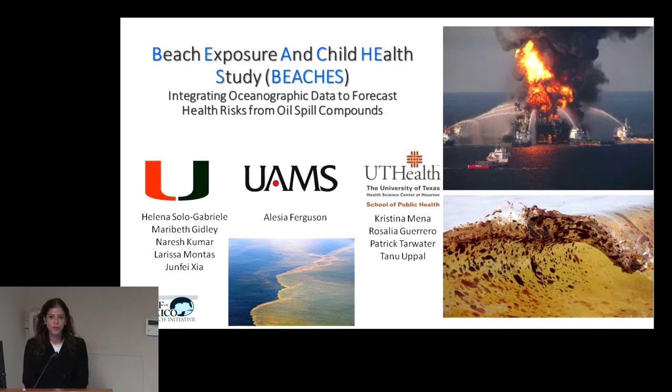During the time of the oil spill, there was considerable uncertainty regarding the health risks associated with the oil spill, especially for children who are more vulnerable. Uncertainty also existed for the spread of oil spill chemicals in beach sand, water, and air. Fisheries and beaches were closed even in areas which were really far away from the edge of the plume.

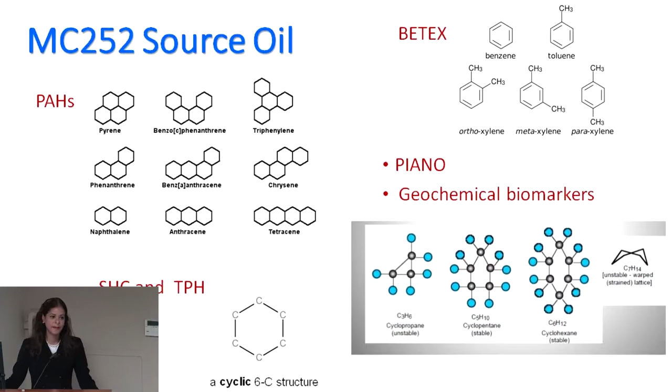Crude oil is one of the most diverse and complex organic mixtures found in nature. It contains thousands of chemicals, with the most predominant ones being hydrocarbons. It's important for us to understand the chemical composition of crude oil because each chemical or mixture of chemicals has a different effect on human health.

The overall goal of the Beaches research study is to improve estimates of uncertainty in children's exposures and risks to their health due to oil spill chemical concentrations.

Now you might ask yourselves, why are we looking at this in light of children? Well, scientific data indicate that children are more susceptible because they have proportionally more intake of chemicals. They have multiple routes of exposure, multiple pathways of exposure, and their activities as related to their social behavioral patterns make them more susceptible than adults.

We plan to utilize historical data from prior oil spills to create, test, and validate algorithms that describe time-space specific concentrations of oil spill chemicals in beach sand, water, and air, especially in zones where children play.

A third part of this project involves creating a risk assessment platform which utilizes the human activity and exposure side of the project in combination with the oil spill chemical distributions to create a risk assessment modeling platform which can guide beach closures in future oil spills. Statistical methods based upon Monte Carlo approaches for the confidence bounds will be utilized for the risk assessment.

Now, how do we plan to do this? How will this be achieved? At this point in time, I am calculating or developing algorithms retrospectively. I am utilizing data generated by the National Oceanic and Atmospheric Administration, NOAA, and its fate and transport model, GNOME, which was run on a daily basis from the 24th of April until August.

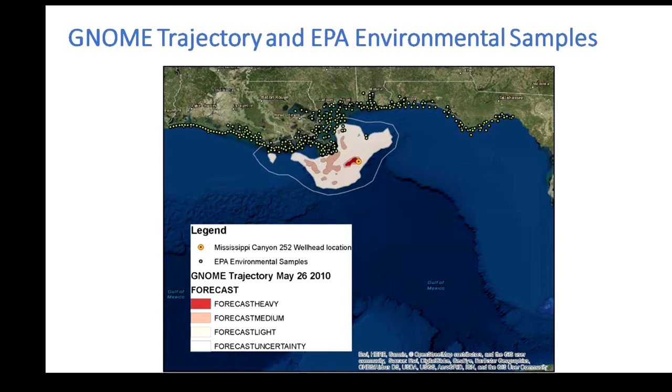Now, where do we go from here? As I mentioned before, the overall goal of this research project is to improve estimates of uncertainty and health risks to children due to oil spill chemicals.

We plan to develop a risk assessment platform which may be used in future oil spills, and we plan to develop algorithms which can predict oil spill chemical concentrations in beach sand, water, and air, particularly in areas where children play.

We hope to contribute to the body of knowledge in risk assessment for children to reduce future uncertainties to health risks in future oil spills. Thank you for your attention.

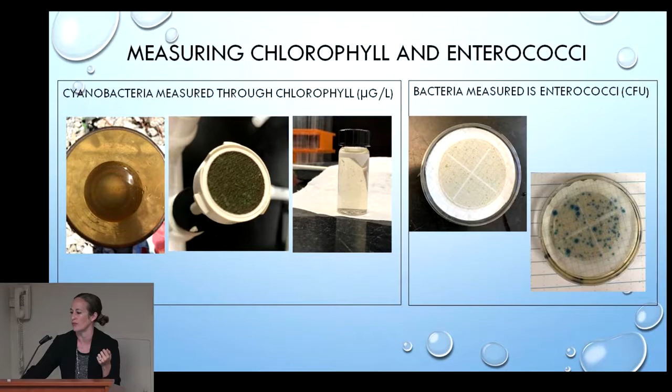How do we measure chlorophyll and enterococci? With cyanobacteria, you can measure this through the chlorophyll itself. It's a filtering method where you put it on the filter, then into a spectrophotometer or fluorometer, and you see the fluorescence that comes back to see how much chlorophyll is present. For enterococci, you measure the bacteria by filtering it through water and through the filter, then incubate it for 24 hours. After that, you count the number of colony-forming units present in the filter.

For this study, we chose 3 sites. The 2 sites, Roosevelt Bridge and Dubois Park, are from the Florida Healthy Beaches program. These are monitored specifically for enterococci. We noticed them through a survey of all the beaches in the state that were measured, and these 2 happened to really stand out with their enterococci exceedances. Roosevelt Bridge is also on the St. Lucie River, an area that tends to have a lot of problems with cyanobacteria.

We also chose a Lake Okeechobee site, since a lot of times when people talk about why these blooms are happening, they mention the releases of water from Lake Okeechobee. So we threw in our Canal Point site, which provided us with background on what was going on in the lake. At the same time, we looked at the enterococci and cyanobacteria at Roosevelt Bridge and Dubois Park. You'll also notice a spot showing the flow from the lake.

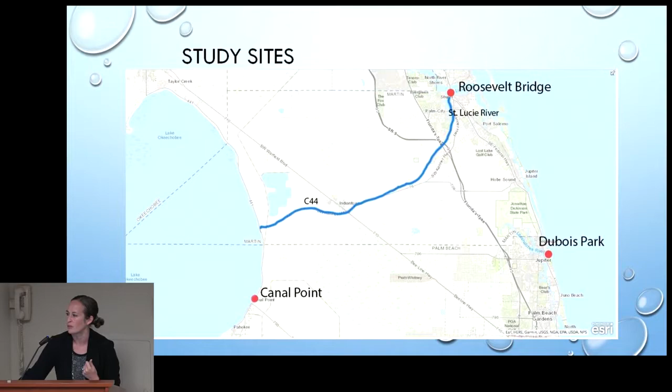C-44 is a man-made canal. This is not part of the river at all, it's been dug out. Right around S-80, about 7 miles from Roosevelt Bridge, it actually joins the St. Lucie River. So it's sometimes known as C-44 S-80, but this is not the entire St. Lucie River — it only becomes the river right up at the top near Roosevelt Bridge.

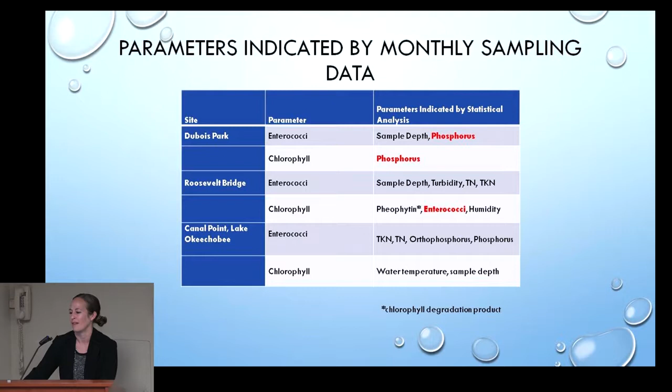So looking at all these beaches, recreational areas, and managed areas, we compared enterococci and chlorophyll to see why these two exceedances happen at the same time in somewhat the same areas. At Dubois Park, which is not known for algae exceedances, on the Loxahatchee River, they don't have these same issues, perhaps because there are no lake releases, but they both have phosphorus in common. Roosevelt Bridge did show correlation with enterococci, and we didn't have much in common with the lake data. So this is what we've learned so far, and future work will focus more on these findings.

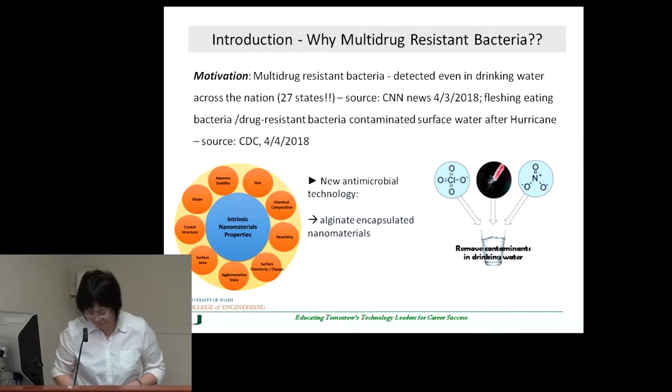So the hypothesis is: what if we make a nanomaterial coated with biodegradable materials so we can minimize the leaching issue of the nanomaterial in water? Second, if we coat biodegradable material onto certain metal oxide nanoparticles that have high resistance against antibiotic-resistant bacteria, we can have better control in terms of targeting drug-resistant bacteria. Another hypothesis involves reactive oxygen species generation, so that with the release and generation of reactive oxygen species, the nanomaterials from aerosol generation can treat and target particular types of bacteria in water.

So the goal is to develop and advance new antimicrobial treatments for multi-drug resistant bacteria, especially to deal with difficult-to-treat contaminants of concern.

So this is the alginate encapsulated zinc oxide. It's a new antimicrobial material. Without the zinc oxide nanomaterial coated on the bead, nothing happens, so no removal in water.

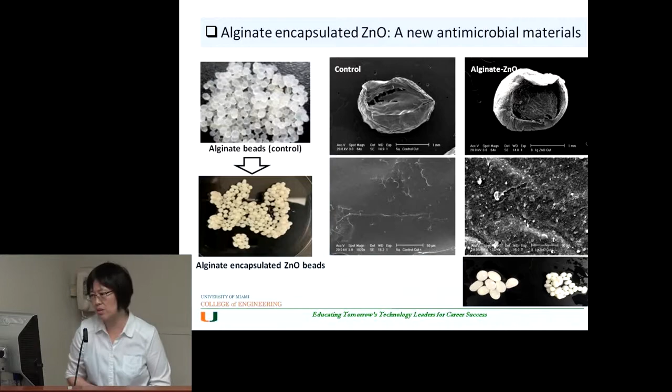But when we coated the zinc oxide, which is one of the materials that has high antibacterial resistance, bacteria can easily be removed from water. So alginate encapsulated zinc oxide beads were successfully synthesized, and we saw significant removal.

Now people are confused about whether E. coli is a deadly bacteria, but there are many different types of bacteria present in water. The E. coli we used was DH5 alpha type, which is one of the antibiotic resistant bacteria, and also Pseudomonas aeruginosa, which is one of the multi-drug resistant bacteria.

So we found very interesting significant removal with only a small amount of zinc oxide encapsulated in the alginate bead. The alginate is an environmentally friendly, biodegradable material.

So in order to confirm the possible mechanism, one of the hypotheses we came up with is the release of reactive species. So what about if we minimize the ROS generation?

So we added the scavenger NAC. NAC is a scavenger of ROS. Adding the NAC, we found significant inhibition of ROS generation, which confirms one of the primary mechanisms responsible for treating the bacteria in water.

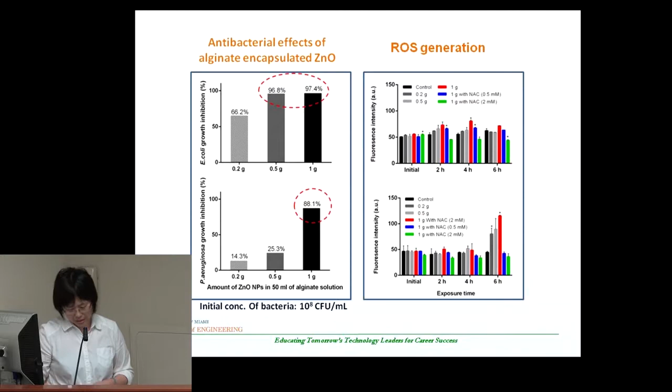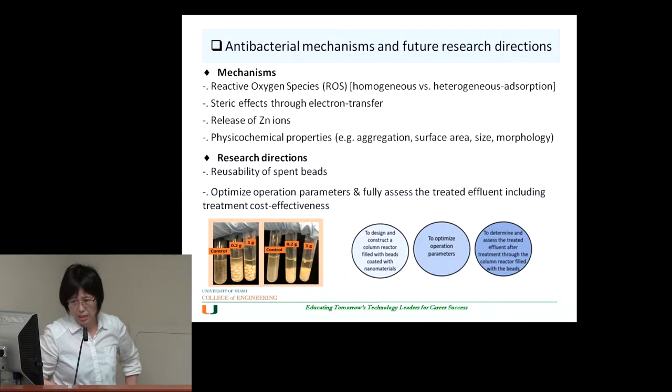So the future research direction is that we want to test how reusable the bead is, and the further application is to optimize the treatment parameters better.

So we are currently working with the company, collaborating with Jacobs CH2M, and this was supported by EPA, and my student is working on this project.

Thank you for that. Okay, so before starting with the presentation, let me set you a little bit in context. So please raise your hands, all those that suffer traffic delays here in Miami. So all of you, right? Don't be shy, come on.

So mainly all these traffic delays are caused by the repair work that takes place in our bridges and roads. Our bridges and roads are mainly made of steel reinforced concrete, which is steel reinforcement with concrete. What happens is that in areas such as Miami, where we are close to the water, this steel reinforcement gets corroded, leading to deterioration of the whole infrastructure and leading to these repairs. Here in the US, per year, we have more than $22 billion in costs for these repairs.

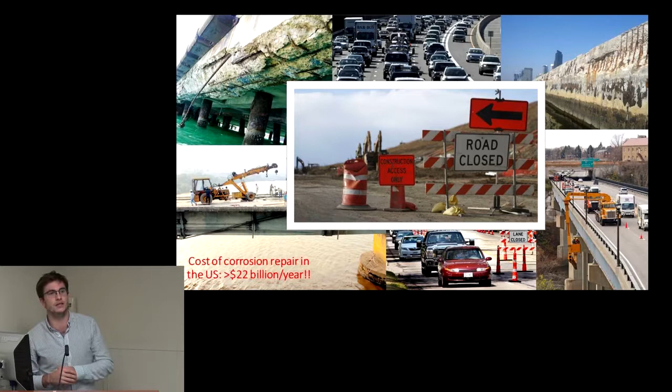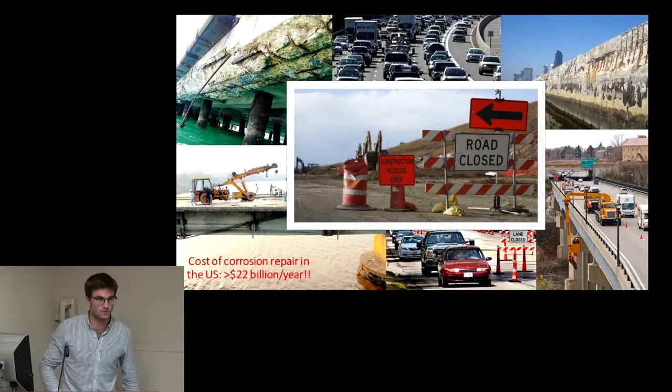So there are many other universities working to try to reduce these delays. What we do here at the U, we always go one step further. So we just try to get the corrosion out of the equation. How do we do it? Using another type of reinforcement, which is glass fiber reinforced composites.

As you can imagine, we cannot be here 100 years testing all these materials to check their durability, so we have to use some tricks, and in this case we use accelerated aging. We put this reinforcement that is going to replace steel into what we call magic chambers, filled with seawater at high temperature. We use three temperatures, 23, 40, and 60 degrees C, and we leave the material for 60, 120, 210, and 365 days.

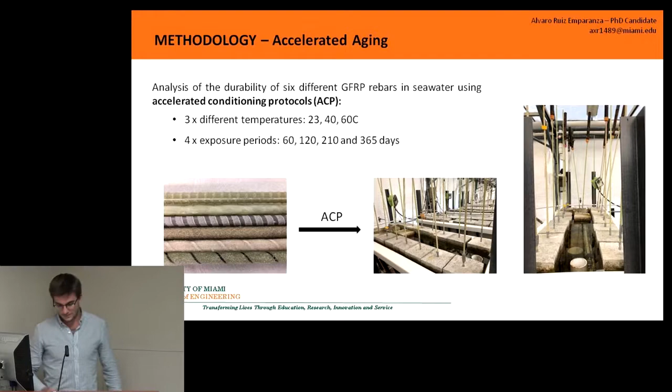After we leave the material for that time, these chambers at high temperature are going to degrade the material. So we need to check the properties before and after this accelerated degradation. We do a lot of testing: mechanical testing such as tensile tests, different shear tests, and also bond to concrete, since that's a very important parameter. And we also go a little bit more fancy.

We go also to the microstructure. We do SEM, scanning electron microscopy, and we check how that degradation is affecting the microstructure, and if there is a big difference between the pristine material that comes directly from the manufacturer and the material that has been aged.

Afterwards, now that we have the accelerated aging data, we have to come up with a relation between that accelerated aging and real life. For that, we use complex mathematical models, such as Arrhenius relationships, that relate that extra high deterioration to what it means in real life.

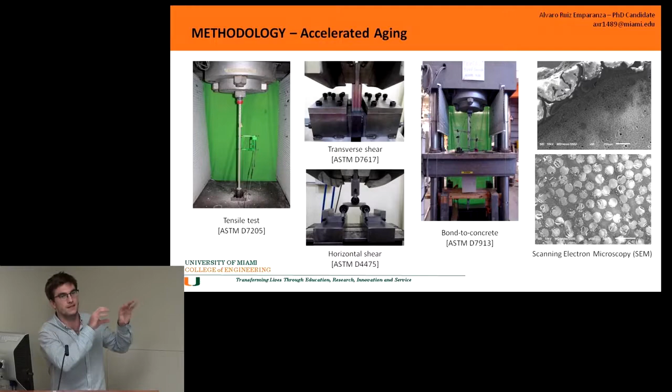So what we saw from this research, it's not completed, but we have a lot of data that allows us to draw some preliminary conclusions. Until now, there's no major deterioration, so we are proving that the durability that this material is said to have is really there. We see that we have different materials and different manufacturers producing different bars, and each of them has different properties, but all of them meet the durability standards.

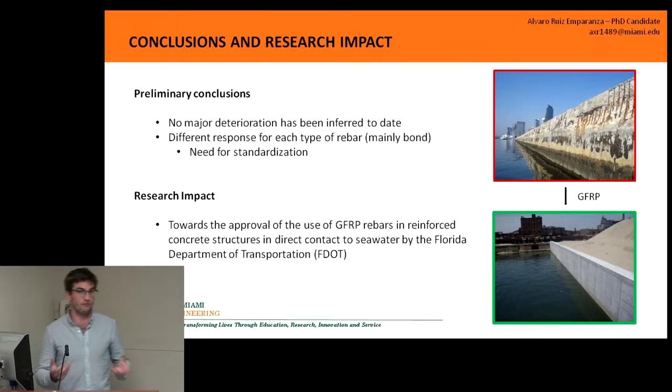However, we are claiming that there is a need for standardization of these materials, since it's going to be better for commercialization. This is the most important part of this project, that it has great impact on our society. Right now, the Florida Department of Transportation, who is very interested and funding this project, is not allowing this material to be used in structures directly in contact with seawater because there isn't enough research. However, they are funding this project because they want to see, after all these tests are done, if the durability is proven, then they will allow the use of this material in, for example, seawalls. Here in Florida, with the hundreds of miles of seawalls we have, we could have them corrosion-free by using this material.

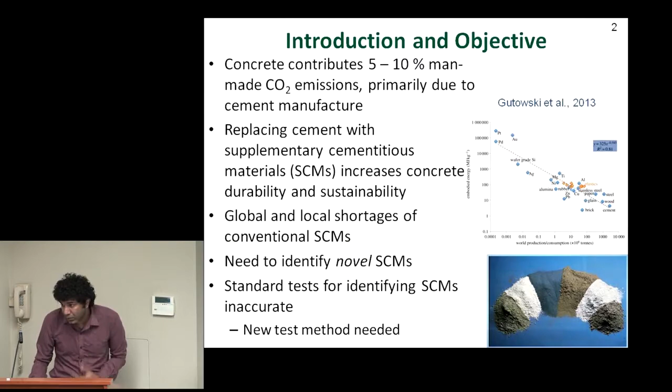So what we've been doing is trying to study the fundamental process of what's happening. That fundamental process is simply that supplementary cementitious materials react with calcium hydroxide. Calcium hydroxide is not good for the concrete. That reaction produces calcium silicate hydrate, which is good for the concrete. So if a supplementary cementitious material is reacting with calcium hydroxide, that's a good indicator that it's good for the concrete. So we have to identify this reaction.

So what we do is use a model system of supplementary cementitious materials and calcium hydroxide, crudely illustrated there. There's a couple of other variables I won't get into the details of. Essentially, we measure two things: how much calcium hydroxide is consumed, and how much heat is released. These are actually not identical, for somewhat complicated reasons, and those are the test methods you use to do that.

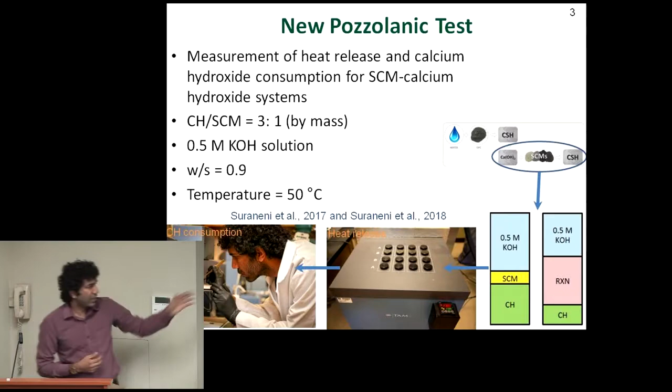That second picture is from a while ago. Unfortunately, I'm not allowed in the lab anymore. Well, I'm not allowed because my students get scared when I'm standing behind them, but just kidding.

So anyway, moving on to some of the results. This is from about 50 different materials, including about 10 or 11 different classes of materials. What we see is that this material classification system we've developed actually gives about 5 or 6 different classifications of these materials. You have highly pozzolanic, more hydraulic, pozzolanic. These are good materials; we want to use them in concrete.

Interestingly, almost all the conventional SCMs that we tested fall into that category, not very surprising. Then we have inert, which is really not doing very much, and less hydraulic, and these, for the most part, are not that effective as supplementary cementitious materials. We tested 3 new materials. One is fly ash coming from the burning of municipal waste. You can imagine that something like this is a material that's going to be very commonly available in the future.

The other is a slag coming from the steel making industry. Both of these materials are from China. Unfortunately, they're really new materials, but they turn out to be not very useful. The third is a powder coming from grinding of lightweight aggregates, which is used very commonly in concrete. That one actually turns out to be pretty good.

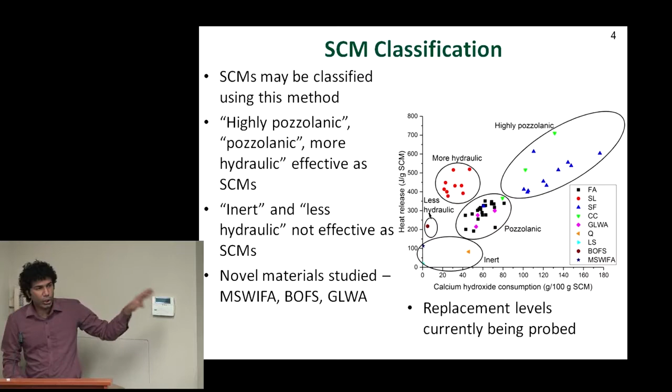We don't have to worry about the individual classifications. The idea is that if you have something over x equals 60 and y equals 200, you probably have a really good material. Right now, we're actually looking at, depending on the classification, what sort of replacement level of cement and concrete we can use. There's actually quite some science into this as well.

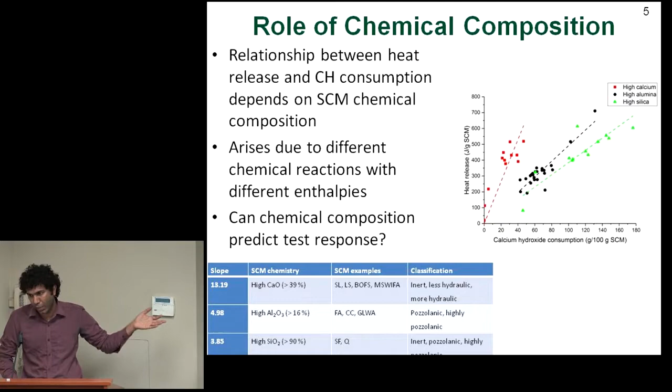So we took all of those 50 materials and grouped them into 3 different types depending on their chemical composition, and this is just the bulk chemical composition. Depending on their calcium, alumina, or silica content, you get very different slopes, and this seems to arise because of different reaction enthalpies. This is really nice because then we only need to measure one of these 2 tests to get the other one. So the idea is we can predict fundamentally from the chemical composition the response.

So to conclude, we propose a new test. This test seems to work really nicely so far. The relationship seems to depend on the chemical composition, and in the future we look to study more new materials as well. Thank you very much.

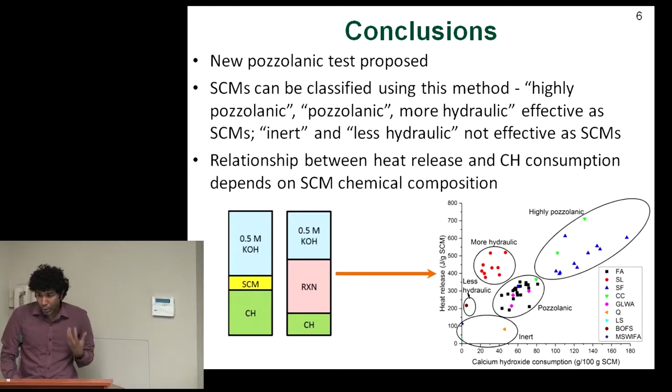My name is Caitlin Kozar. I'm a PhD student under Dr. Garamani. My topic is a bio-inspired approach to sustainable concrete.

So right now I'm focusing on 3 common proteins. These are actually very well-researched proteins. Albumin and lysozyme are both used in food products—you've probably eaten them today. And hemoglobin, as you know, is found in blood. The reason we chose these is not only are they well-researched with known properties, but we were able to test their foaming properties in an alkaline solution.

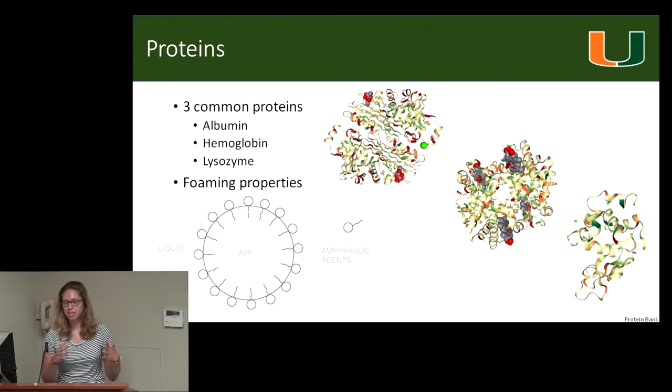Now, cement is very high pH. It is not very well suited for living situations for these proteins. So we focused on the actual foaming abilities. Basically, we did various tests. Anyway, we put these into cement to test the changes they actually made in the cement.

For albumin, we actually saw a high increase in the air content. As you can see, it went up to 6.5%, which is far greater than a normal cement. It also increased the setting time and decreased the flowability, which allowed the air voids made to remain trapped in the cement. Hemoglobin was very similar—it had a very high foaming ability, but a very low air content because the flowing was so high and the setting time was over 30 hours, which allowed all the air to escape.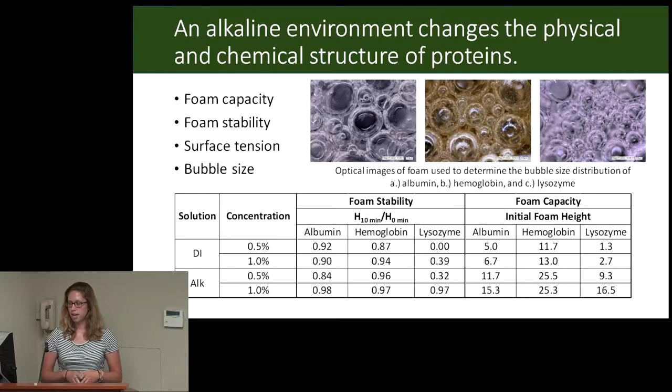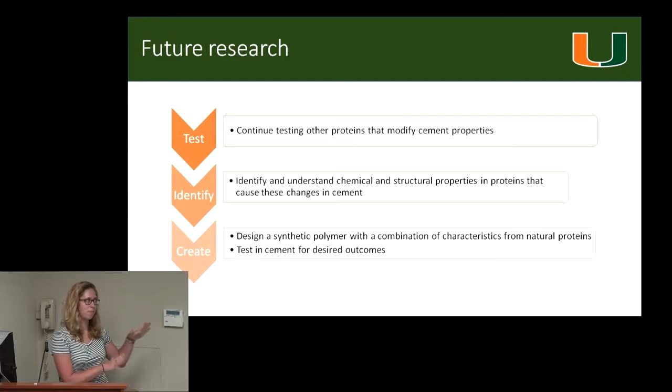So we tested basic tests in these alkaline environments that are well known in distilled water and other materials, and compared them to our results in cement. We're currently working on analyzing the results and finding connections in how we can continue this and test other proteins, synthetic polymers, and other modifiers in order to eventually create our own bio-inspired admixture based on proteins as a building block. So yeah, that's about it.

Good morning, everyone, and welcome to this presentation. My name is Babak. My advisor is Dr. Ali G. I'm going to talk about the use of hydrogels to improve the sustainability of concrete.

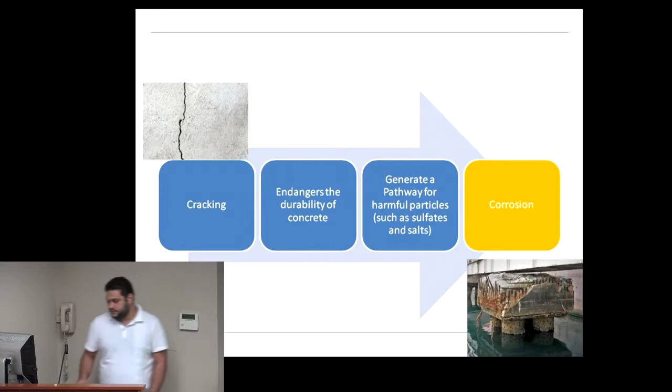Most of you know that concrete is a widely used material in construction, but one of the problems with concrete is cracking, which endangers the durability of the concrete because it generates a pathway for harmful materials such as sulfates and salts, which cause corrosion. We have different types of cracks—I'm not going to talk about all of them.

Some of these happen before the hardening of the concrete, and some happen after the hardening of the concrete. So what I want to look at is the autogenous shrinkage of the concrete, which is the loss of water from the paste to allow hydration in mixes with low water-to-cement ratio.

So the idea here is that because we lose water from the paste in the concrete, we get cracking, but we have to do something to keep the water in the system.

So the idea is to use a material called super absorbent polymer, SAP. The commercial version is used in baby diapers. It has the ability to keep water inside, absorb it, keep it, and also release it over time so that we can control the shrinkage.

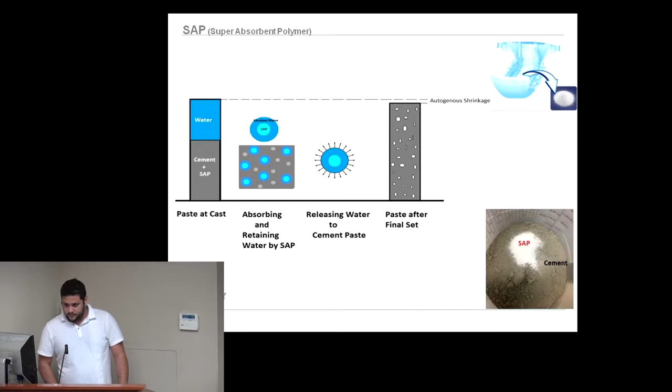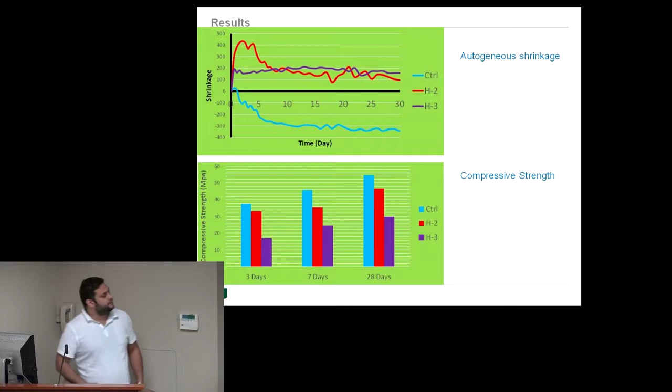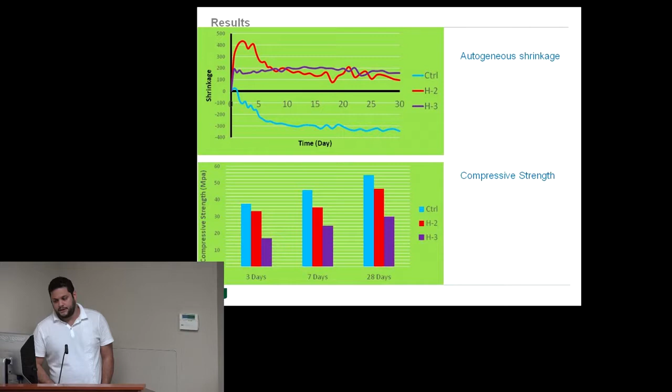So this is my result. I have already used two different kinds of SAP. As you can see in the first graph, the amount of autogenous shrinkage is mitigated using the hydrogel. But the problem with the hydrogel is that the compressive strength reduces, because it leaves some voids inside the paste.

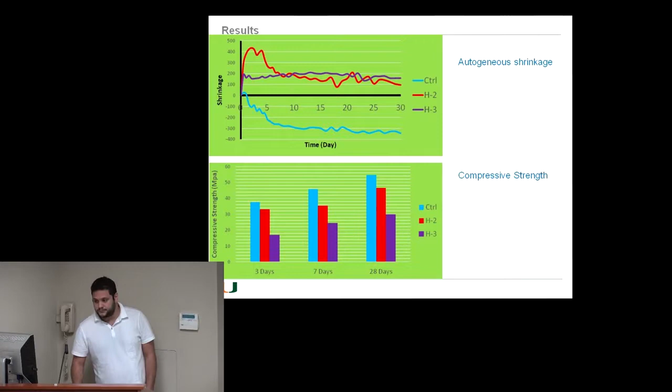Good morning, everyone. I'll be talking about the enhancement of coastal resilience in terms of our structures in our cities. This is all about collaborative design and multiple projects with multiple experts.

The disaster could be man-made. In this case, we're talking about hurricanes, coastal storms, flooding, and other events. So it's not just reacting to an event, it's how we get back. There's a component of time, and there are multiple perspectives on that.

Because there are multiple perspectives, we have to address this complex problem through a collaborative design approach. Collaborative design is not an abstract concept. It has been studied and well defined in literature, and one definition by Kuan describes it as parallel expert actions. This is something we all do.

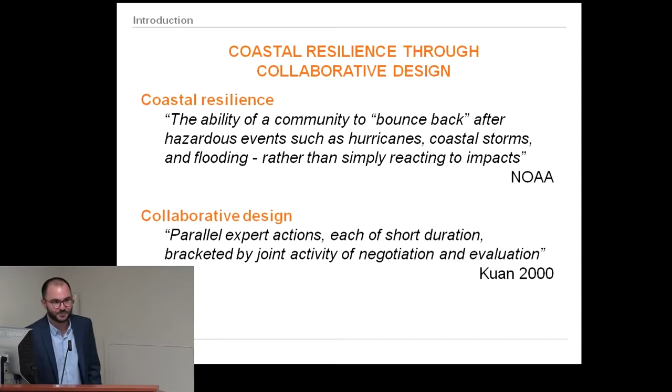They have a short duration—that's relative, they can be long or short—but what I want to focus on is the last part, where we are bracketed by joint activity of negotiation and evaluation. If you've ever worked in teams and collaborated, I'm sure you had interesting negotiations and evaluations throughout your projects. So I'm going to show you a series of projects where this happens all the time.

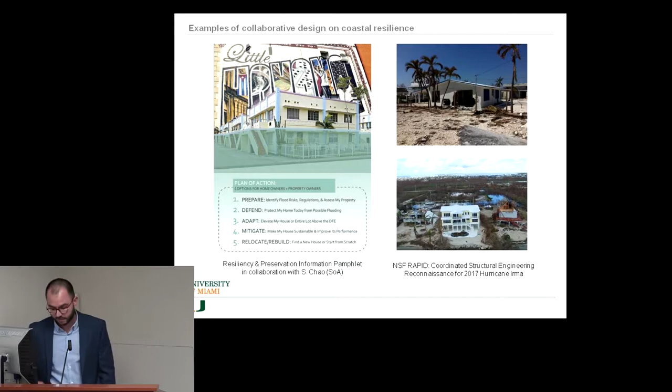This is actually what we're studying in another collaborative project with RSMAS and Brian Haus at the SUSTAIN facility. SUSTAIN is the surge structure atmosphere interaction facility. We simulate wind and wave action, and we can come out with the load under different time series so that we can test structures and understand the interaction between wind and wave under a hurricane.

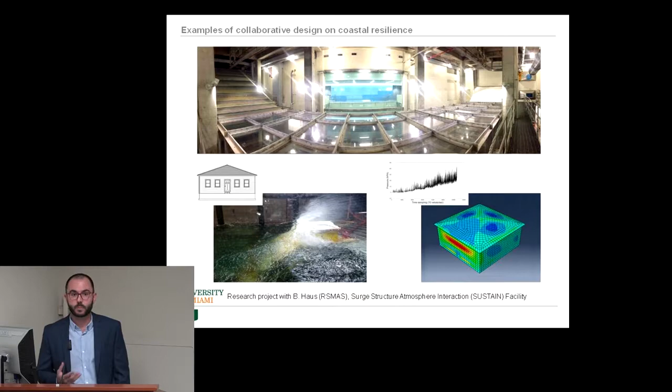So we want to study the loads so we can reinforce our structures, but in order to enhance coastal resilience, we can also protect our structures. To protect our structures, we can work on multiple fronts. One of those, which relates to a talk given previously by Alvaro on composite materials, is this project that just came in.

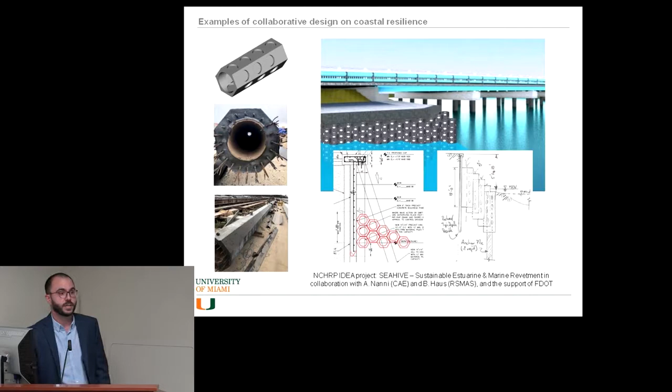This is going to be a project about an eco-friendly, biocompatible, modular, efficient seawall design. In this project, we collaborated with Dr. Nanni, as well as Brian Haus, to get the efficiency there. But we also worked with ecologists who ensure biocompatibility, not only in terms of the material, but also in terms of the shape and structural complexity of the design.

Another project is the U-LINK project—the Laboratory for Integrative Knowledge, studied in our school. In this project, we're studying the effect of corals on wave energy dissipation.

So what we're doing there is we're working with ecologists who are focusing on coral restoration to see how corals can be used to actually enhance our coastal resilience, so how they can protect us from the waves.

We make measurements of the waves before and after a coral reef, and we estimate the wave energy dissipation, which is the key parameter that determines that, and how we could enhance that with structures.

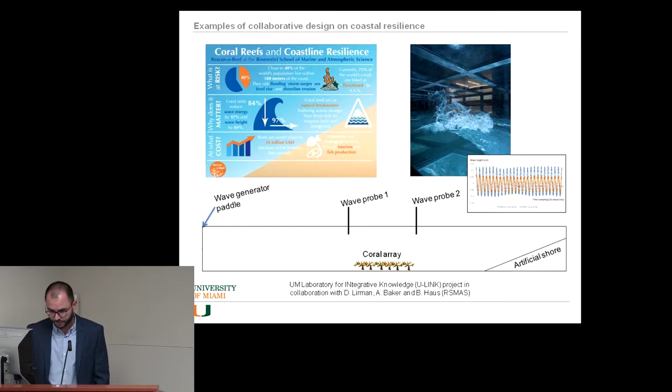Lastly, when we go to the scale of a city, there are multiple parameters there. At the city level, we cannot act only on engineering; we have to take into account urban design, and we have to take into account the social science that is hidden within a city. A city is a living organism, and it has a social character.

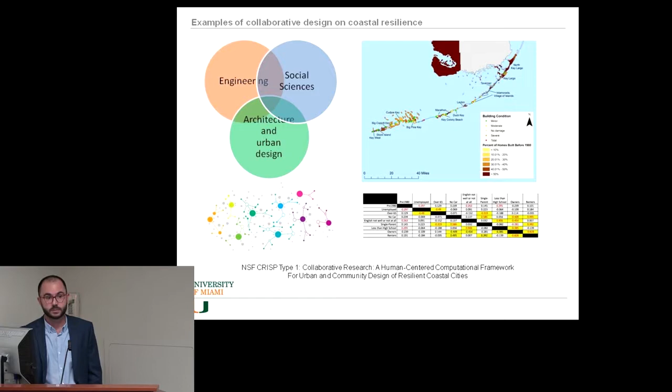So what we're doing there, we study the infrastructure networks using graph models in order to understand their behavior under damage, quantify their performance throughout, and integrate those social aspects through our models.

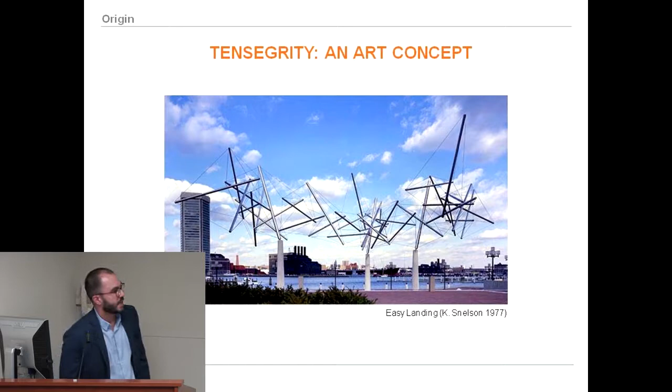Directly when he did that, he was working with Buckminster Fuller. Buckminster Fuller is a well-known architect, engineer, and a multi-dimensional personality. He came up with the word tensegrity, tension and integrity, which then was used in multiple other projects.

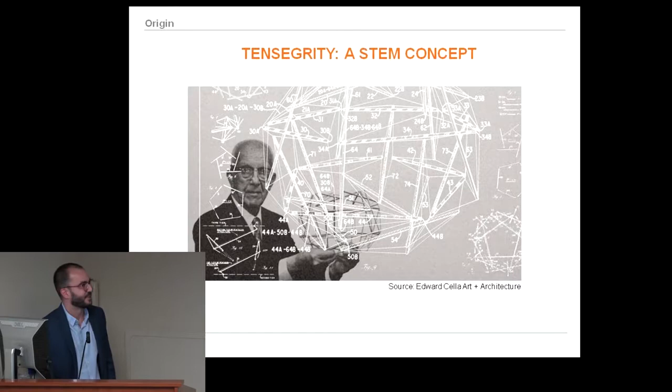So tensegrity has since gone from art into science, starting from mathematics. It also went from art directly to architecture. Architects have been proposing tensegrity structures due to their aesthetics.

You see here, this is the Blur building, a temporary construction in a lake that looked like a cloud in the lake, but actually had that skeleton, which was a tensegrity structure.

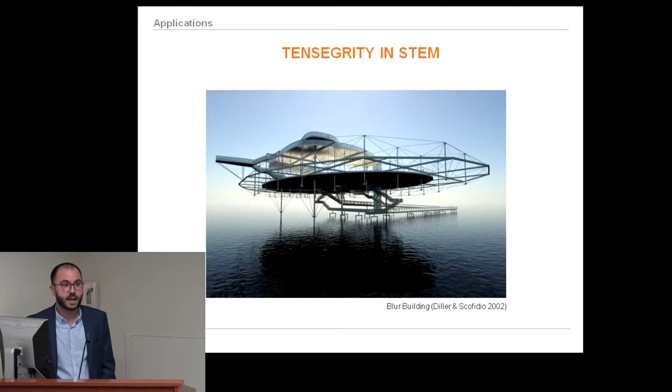If the architects used it, we have to guarantee its stability, and engineers directly jumped in. Civil engineers saw that we can have long spans. So this is a tensegrity roof, again in Switzerland.

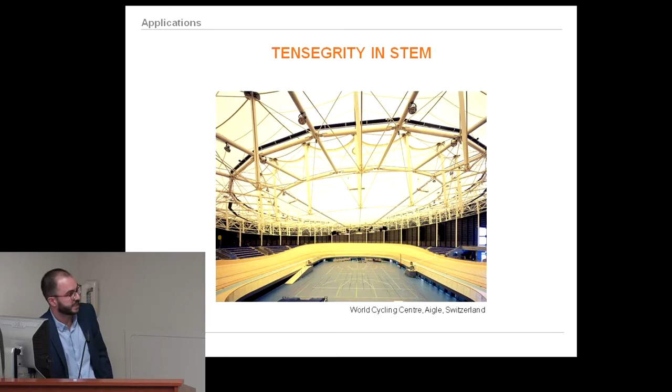It's the World Cycling Center. It has a tensegrity roof, and it's a very interesting and aesthetically pleasing structure. So we have to guarantee the stability of this thing.

But beyond that, it has been used in science. Dr. Ingber, who visited our school a couple of years ago, has been using that for the modeling of the cell, the cytoskeletal mechanism, in order to simulate the combination of the mechanisms with respect to the structure of the cell.

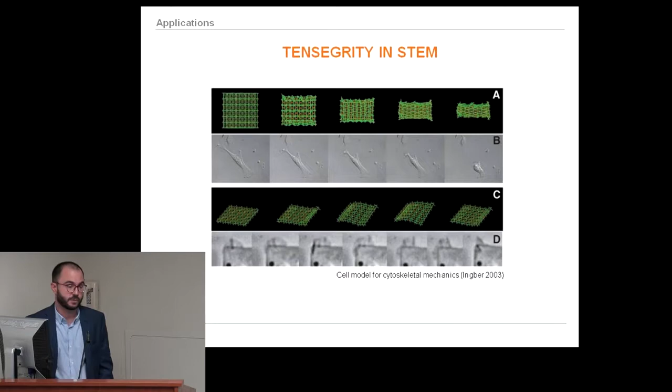And of course NASA jumped in also because these are robust structures. NASA presented this ball-bot, the super ball-bot, which is basically a tensegrity structure they came up with, which has actuators in the struts, so it can change the length of those elements, and by changing the length we can make it move. So they proposed this design for planetary landing and exploration.

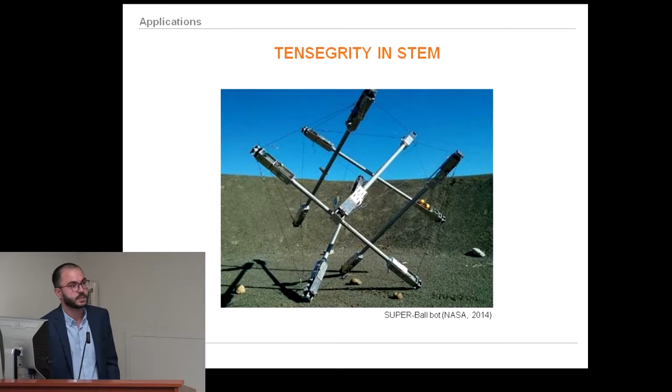So before we send anything to space or put it in our buildings, we have to guarantee that it's stable, that it works, and understand its performance, not only in the short term, in the long term, but also under damage. So this is what we are doing here.

So we are focusing on the generative design, how we can have these structures designed and get the desired properties that we want. We want to control their shape, we want to control their behavior, and we want to also inform their assembly.

Their assembly, although it looks elementary, is a big problem, because typically the stability is not guaranteed unless you have all the elements in place.

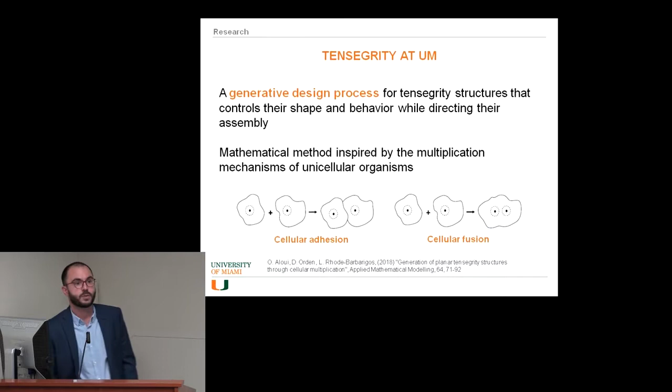So what we're using, again, we use a little bit of math, so we use rigidity theory and graph theory, and we are inspired, like the previous talks, from nature, so we use the mechanisms of adhesion and cellular fusion. We're putting things together and they stay together as independent organisms, or they fuse together, and by doing that we can create complex structures.

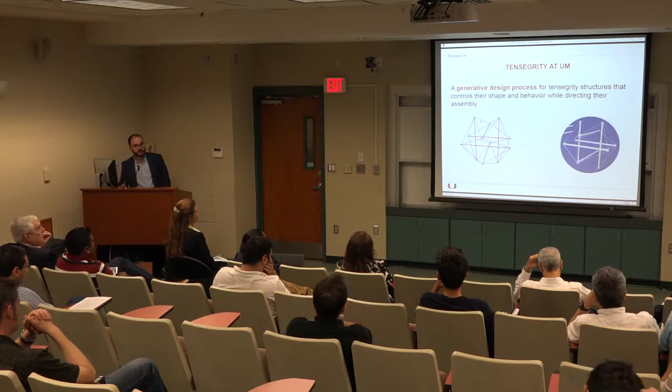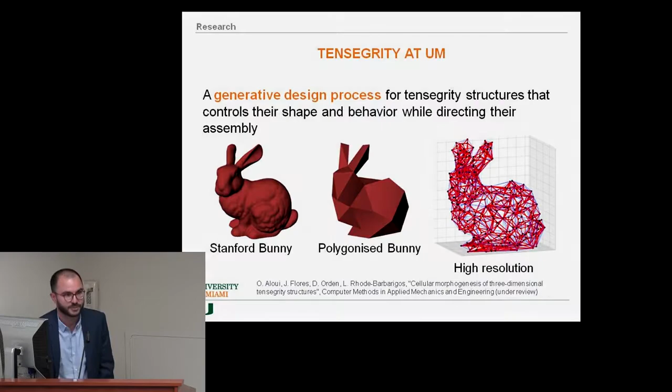This is pretty basic, but when you're using a method, you have to show that you can do interesting and more complicated stuff. So we came up with a Stanford bunny, which is a benchmark problem in computer graphics. We polygonized the bunny and did different resolutions of the tensegrity. This is class 1, where the bars are not touching, but we also did other versions. This is another low resolution version, and something I will ask my students to build: the high resolution. Thank you.

Good morning everyone. I am Haluk Damgacıoğlu. I am a PhD student in the Department of Industrial Engineering, working under the advisor of Dr. Nurçin Çelik. Besides sustenance and sheltering, electricity is the third most important thing in our lives in today's world.

Our research mainly focuses on how we can make electricity available to all the people at all times. Unfortunately, our current electricity system still allows some power outages and disruptions, for example especially in natural disasters. After Hurricane Irma, 80% of Miami-Dade County was left without power, and nearly a week after, 25% of the accounts were still in the dark.

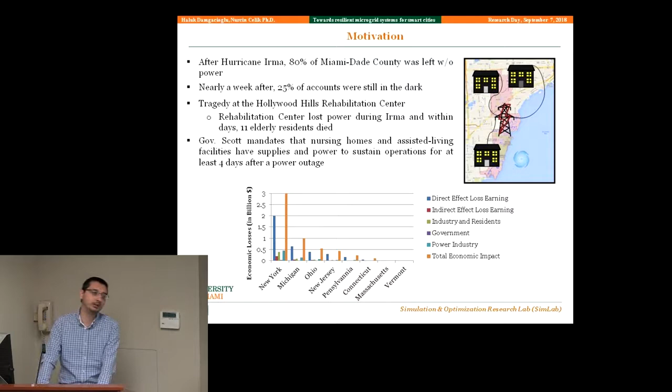This also happened at the Hollywood Hills Rehabilitation Center, where the center lost its power during Irma, and within days, unfortunately 11 people died because of the power outages. Apart from this tragedy, these power outages and interruptions can cost billions of dollars on the US economy, based on the Department of Energy.

So after the tragedy, people start to buy generators. However, the generators can break down. They need ramp up time to produce enough power and work efficiently, and they have important drawbacks on the resupply of raw materials. Therefore, generators are not a reliable or resilient solution for our needs.

On the other hand, microgrids promise energy independence and more energy resilient solutions for our future and today's world. Basically, microgrids are a localized group of distributed energy resources, including renewables, diesel generators, energy storage units, and controllable loads. This concept allows us to control both the generation and demand simultaneously.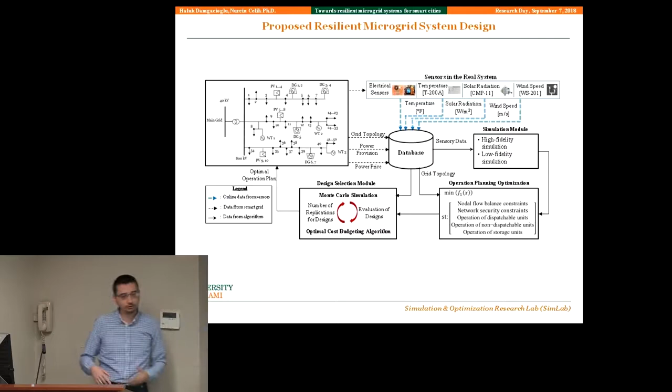This is our main framework to operate the resilient microgrid and design a microgrid. Basically we collect data from the microgrid, from the real system, and first run the low fidelity simulation, which allows us to assess the system in real time. Because if you focus on high fidelity simulation, only 1 second of simulation takes minutes. So first, low fidelity simulation tells us whether we have enough power or not. If we don't have enough power, we run the optimization model, high fidelity simulation, and design selection model to satisfy the critical demand in the microgrid system.

Even though we have advanced technology on energy systems, these devices, the components in microgrids, are still not smart. For example, PV arrays should be controlled to extract maximum power, and we need to control the batteries considering their non-linear characteristics. Here we also use a two battery system to increase the resilience and reliability of the system. We also need to regulate the voltage and current in the system, and we have a user interface where we can monitor the system and control the loads.

So we first implemented our framework on a proof of concept study in the emergency operating center in the city of Coral Gables. This center includes the 911 system, and our results were very promising.

Here we first determined the battery sizes and solar PV panel sizes, then we ran the considered worst case scenario, meaning we have only one battery available, no solar panel, and no diesel generator. With 80% state of charge value for only one battery, we can provide continuous power for the 911 system for 90 minutes, which is a requirement from the city of Coral Gables.

Our system response time is also very low, in a second. For example, after a power outage occurs, we can provide continuous power after 0.15 seconds. Thank you for listening. If you have any questions, please let us know. We'd be happy to discuss with you. Thank you.